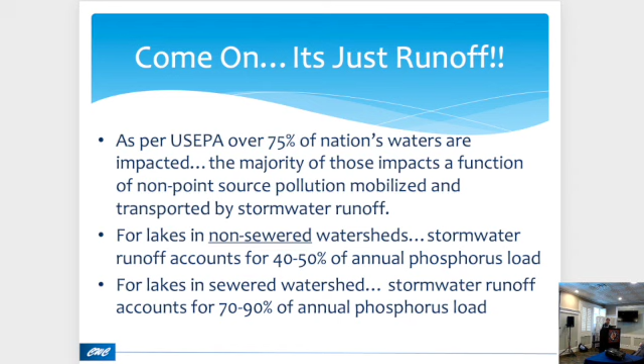So, like I said, I've studied numerous lakes, and I can say definitively for lakes in non-sewered watersheds, where you have septic systems, stormwater runoff accounts for about 40 to 50% of the annual amount of phosphorus that enters your lake. And when you have a sewered watershed, the numbers jump up even more significantly. 70 to 90% of that phosphorus that enters your lake on an annual basis originates as stormwater runoff. So it is a big deal for lakes because the eutrophication of lakes, what makes our lakes greener, more algae blooms, more harmful algae blooms, even more plant growth, is all directly linked to phosphorus.

And when you look at the concentration of phosphorus in stormwater runoff, it easily averages around 0.3 milligrams per liter, okay? That's tenfold more than what is enough to stimulate and sustain a harmful algae bloom. And that's with every single storm. That stormwater runoff has concentrations from about 0.275 to even greater than 0.5 milligrams per liter. That's a lot of phosphorus that's entering your lake with every storm event.

So as a result of that, and this has been sort of a common thread with my recommendations for all lakes, you have to manage stormwater runoff. Managing runoff results in less phosphorus. Less phosphorus means your lake is not eutrophying as quickly, means that you're not seeing as much algal productivity. Less algae blooms, less infilling from sediment, things like that. So stormwater management has to be a foundation of every single lake management and restoration plan. That has to be your foundation because it's your biggest source of problem.

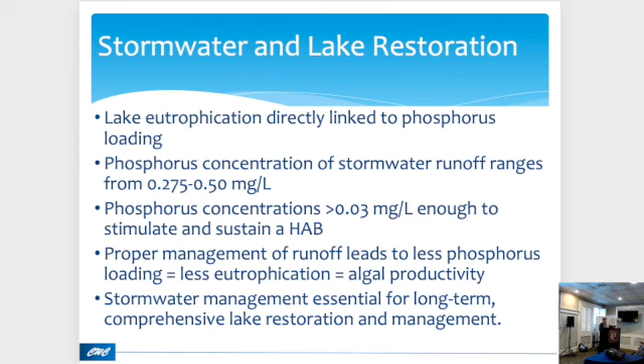So why does this happen? I'm not talking undeveloped watersheds, I'm talking minimally developed watersheds, okay? Every time it rains in a watershed that has not been extensively developed, only about 10% of that precipitation actually emanates as runoff. The majority of it gets absorbed back into the ground or is absorbed by plants and is lost via evapotranspiration. So only 10%, because there's not a lot of impervious cover, so the ground can soak it up, the plants can take it up, and you're not generating a lot of runoff.

But when we flip the table, now about 55% of that precipitation generates runoff. Okay, so that's a big, big difference. And you're probably saying, okay, well, I have to have development like something that I would see in Newark or in Camden. No, that's not the case. You start to see these problems with impervious cover of only 10 to 20%. What does that equate to? That equates to 1 house per acre. Okay, that's suburbia, all right? Not urban land, suburbia. So you start to see these problems with a minimal amount of development.

And that's why our lakes are subject to so much phosphorus loading and why we're subject to these problems with harmful algae blooms and extensive productivity.

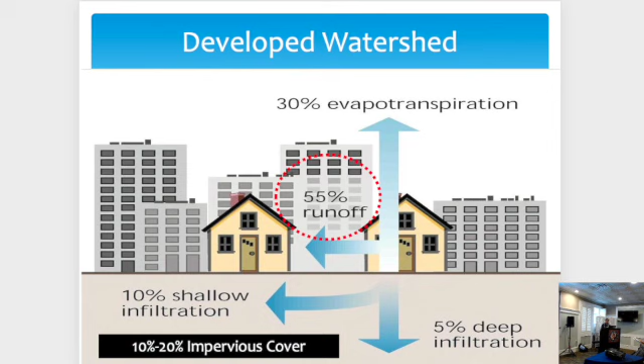Okay, so Sabine knows all of this stuff, and I'm sure there's a lot of others in here that know this, but the problem with development on watersheds is that you end up generating more runoff that leaves the land and enters the stream that feeds your lake or directly into your lake. That runoff is generated earlier in the storm. It's generated at a higher rate, so it starts to mobilize and transport more pollutants. And there's an increase in volume, and that's the big thing, because volume is our problem, okay?

We can control the rate of runoff very easily. I'll show you some examples. However, volume is something that is very difficult to control, particularly with our state's stormwater regulations. Our regulations are primarily rate-based, not volume-based, okay? So as you get more impervious cover, you generate more runoff, it gets to my lake much more quickly, it mobilizes more pollutants, and I have more coming into my lake, all right?

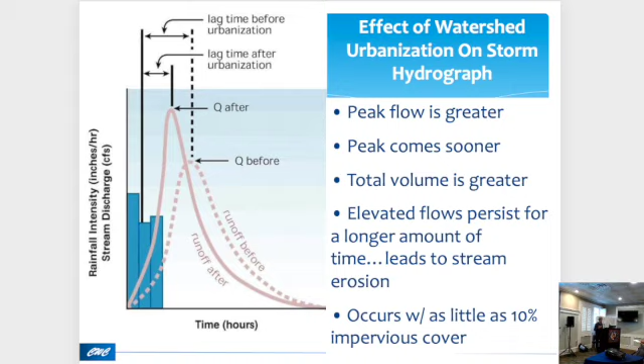So that results in this sort of cascading effect where I change the land use within my watershed. That results in a change in hydrology. When we talk about hydrology, we're talking about volume. It also changes the hydraulics of that runoff. When we talk about hydraulics, it's how fast that water is coming at me. So it's volume and rate.

You end up with more runoff, you end up with more pollutant loading, that accelerates eutrophication, and then all these other problems that we see: impacted lake use, degraded aesthetics, harmful algae blooms, and the cost to manage our lakes, all because of a little bit of runoff, all right?

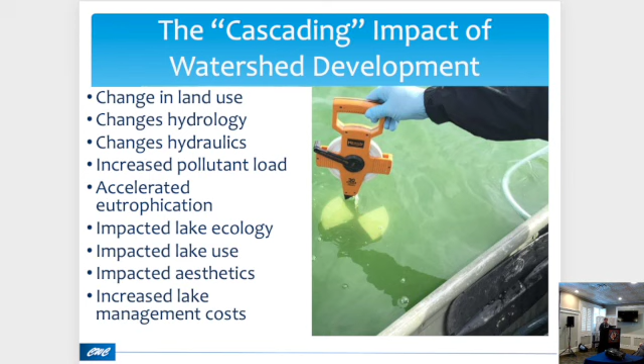Now, as I said, our state's stormwater regulations, although they have been modified repeatedly, and they were modified significantly just this past year, are still primarily rate-based. And the way most engineers have been taught to deal with runoff is to think of it as a waste product. So what do I do with it? I try to collect it and concentrate it as quickly as I can. In some cases, I may have a basin that it gets routed to. It's held in that basin for a given amount of time, and then it's released, okay?

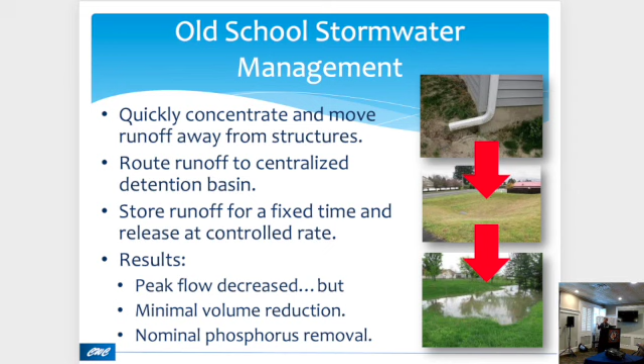But in most cases, it's routed to a detention basin, and with detention basins of the old school design, you have minimal opportunity for pollutant removal, you have minimal opportunity for recharge, and yeah, I can hold the water back, but I'm not decreasing volume. So the fallacy with detention, which is the standard approach that engineers continue to utilize to manage runoff in this state, is to collect it, hold it, and then get rid of it, all right?

But when you have a basin like that, and how many of you have basins like this in your watershed? Have you gone around and taken a look, with a concrete low flow channel, they're mowed, there's not a lot of vegetation in there? Those basins have a compacted bottom because of the way they've been constructed. So the soil is compacted. That impedes recharge. It's covered with grass. The roots on lawn grass are about 1/2 inch. That's about it. So again, there's no way to really help that collected runoff permeate down into the soil.

And in addition to that, because it's just plain old lawn grass, there's no filtering, there's minimal opportunity for bioassimilation of any of those nutrients. And so, yeah, this can do a really good job at detaining flow, but it doesn't do a really good job at treating stormwater, and that's what we really need, okay?

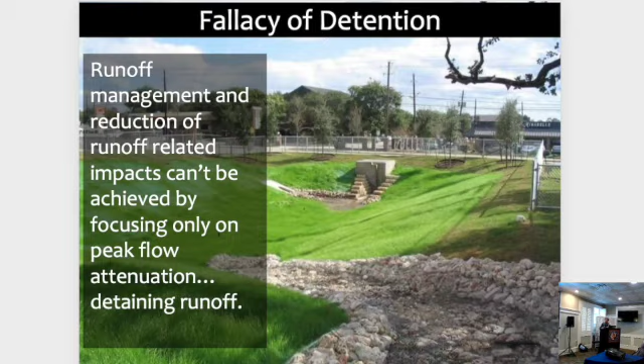All right, so what can we do? There are a lot of things that we can do. Some of these fall on our own shoulders, and some of them can be done on a community scale, either with or without the cooperation of a municipality, okay? So I'm always a big advocate of: number one, it's my problem. Let me see what I can do to solve my own problem.

And I try to divide stormwater management into 2 categories: source control activities and delivery control. So with source control, what I'm trying to do is prevent the problem from happening in the first place or decrease the problem. That means, for instance, I'm going to decrease the amount of phosphorus, nitrogen, and sediment that's coming off of my own property or the Lake Association's property. I'm also going to look at ways on my own property to decrease the amount of runoff that's leaving my site. I want to embrace that. I want to think of stormwater as something that's beneficial.

It's not a waste, it's a resource. I want to hold on to that as opposed to just pushing it off and making it somebody else's problem, like has been the problem that Anthony was talking about. You know, we don't want that.

In addition to that, then, there are ways that you can collect and better manage that runoff, and that happens through delivery control, where I'm going to use structures to intercept that runoff and either treat it before it's released, so I decrease pollutant load, sediment, nitrogen, and phosphorus, or I can hold it and maybe decrease volume.

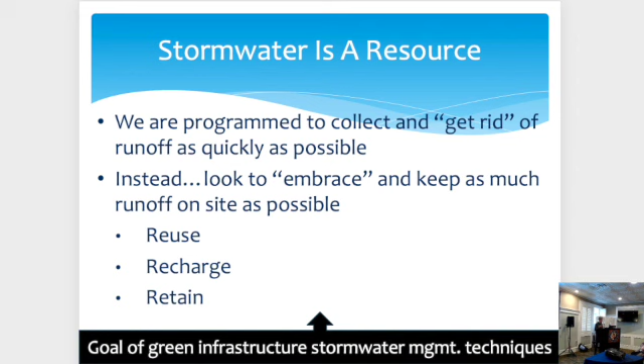So instead of being programmed just to get rid of that, let's look at ways that we can do that. And there's a lot of examples that are called green infrastructure stormwater management techniques. They use vegetation and soils in combination to really decrease runoff volume and keep runoff on site as long as possible. And those techniques really help turn down the volume. And I'll say it once and I'll say it multiple times, it's the volume that's the problem, okay?

And so anything that we can do to put water into the ground or harvest it and retain it. You may think, okay, if I have a rain barrel, that's only 100 gallons. However, that's 100 less gallons that ends up in my lake. And I can use that to water my vegetable gardens or flower beds or whatever, and that's 100 gallons less of water that's coming out of my well, or water that I'm paying for as part of my monthly utility bill. So there are benefits from a cost saving standpoint, as well as from a stormwater management standpoint.

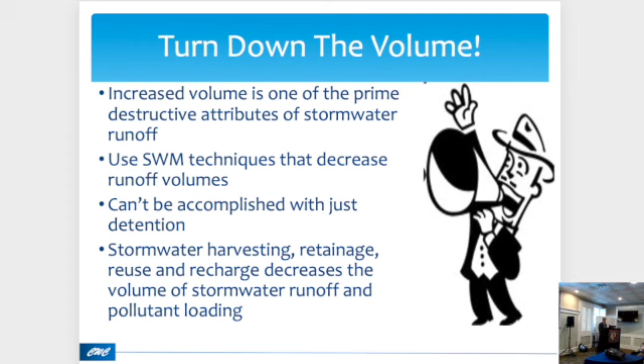Now, this is a big part of the problem with the way engineers and the way the rules are written in dealing with stormwater runoff. Number one, in New Jersey, because this is a developed state, a lot of the development, particularly in central and North Jersey, maybe not so much in South Jersey, occurred prior to 1975. What's the importance of that? Well, up until then, New Jersey did not have any stormwater regulations at all. So somebody built a parking lot, an Acme, whatever, and there was no need to manage any of that runoff.

It would just be discharged into a storm sewer system and then on its merry way to a stream, wherever. The thing is, even now, New Jersey's focus is really on the larger events, what's called the 2, 10, and 100, or more correctly the 50%, 10%, and 1% storms. A lot of the damage, though, is a result of much smaller events. If you look at the New Jersey stormwater management rules, rate control only applies to the 2, 10, and 100-year events. The 1-year storm is considered the water quality event. There are some requirements now to intercept that and manage it with green infrastructure to decrease volume, but those regulations went into effect in 2021.

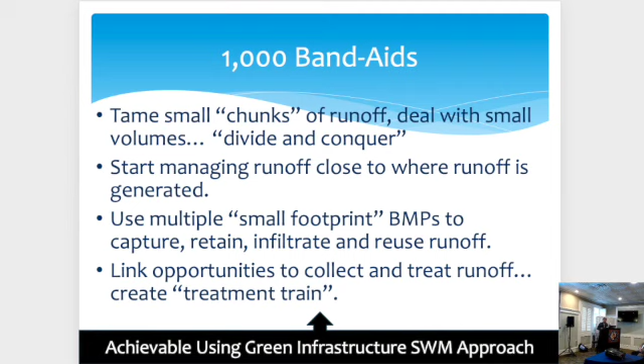And then with green infrastructure, we're using a combination of soil and vegetation. It's just not vegetation. So it's not just I dig a hole, I plant a bunch of plants in it, and I cross my fingers. You have to have the hydrology, the soils, and the vegetation all working together. But when done correctly, you can significantly reduce the volume of runoff entering your lake. And these are perfect strategies for lake communities.

So what I'm going to do is show you some examples of green infrastructure that can be done on a single lot application and also on a community-based application, including actual projects implemented with private money as well as public money throughout the state. So the first thing, this gets back to what I could do on my home base that probably is not even going to cost me much money.

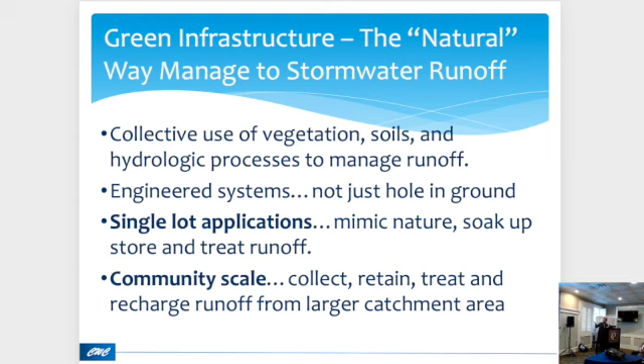So one of my lake clients, she came up with this term lazy landscaping, which I loved. And essentially what I'm going to do is, number one, wherever I have lawn, I'm going to look for ways to decrease lawn. If I lived on a lake, I wouldn't want to be spending my Saturdays and Sundays mowing. I want to spend my Saturdays and Sundays enjoying the lake. So why have all this expansive lawn?

But in any event, alternative ground covers, decrease the amount of turf in lawn. Avoid fertilizer and pesticide applications. In most cases, you don't really need any of that by aerating and liming your lawns. And especially for lakefront properties, do shoreline buffering. And I'm going to show you examples of that.

And then we have the opportunity to collect and hold on-site runoff. So rainwater harvesting, even though each one of those barrels may only store 50 to 100 gallons of runoff, that's 50 to 100 less that's entering my lake. Those of you that know Chris Obropta, he calls rain barrels the gateway drug to stormwater management.

People do this on an individual basis, or they do it on a community basis. It's a scout project or whatever. And then all of a sudden everybody's, okay, that's not too bad, I can do that. And then, oh, what's this stuff about rain gardens? Maybe I'll do that as well. So it becomes sort of like an entry into on-lot individual stormwater management.

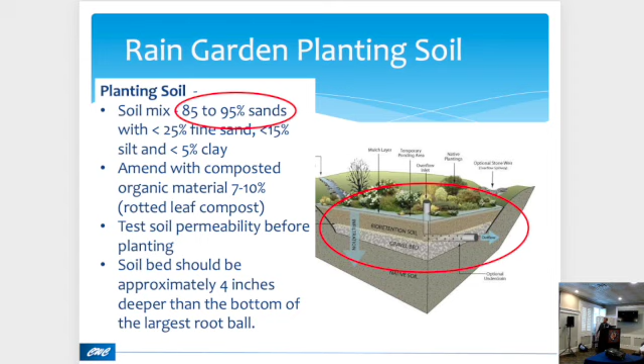But this is right out of the stormwater manual. Guidance for individual rain gardens. And if you want even more design, you can download this document. This is from Rutgers. I've provided you with the link to that PDF, and this is Chris Obropta's baby.

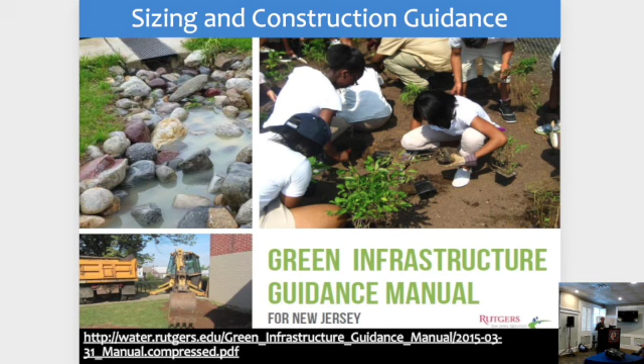Basically this manual will tell you how to compute the size of the rain garden that you need, how big, how deep it needs to be, the correct type of soils, and it'll provide you with a whole variety of plants that you can use successfully in those rain gardens. And then additionally, there's an app for this, believe it or not. So University of Connecticut has this great app.

I've got it on my phone. You can go onto your own property, identify what type of soils you have. It will provide you with guidance in terms of, again, the basics, how to design it, what plants to put in the system, what's going to work where it's a little bit drier as opposed to a little bit wetter.

One thing to keep in mind with rain gardens, because they're designed to deal with those more frequently occurring events, but they're also designed to put water into the ground, not to keep it there in a flooded condition. You're going to be dealing with plants that are more drought tolerant than wet tolerant. Okay, so that's one thing to keep in mind. They like to be inundated and be saturated for a while, but for the most part, they're going to be probably pretty dry in those little rain gardens. Okay, so it's something to keep in mind.

But anyhow, this app is another great way of providing guidance on how to build a rain garden, what to put in it, and how to maintain it as well.

Dry wells, I have one at my house that I put in. I moved into that house in '82. Probably put that in around '86 or so. It only deals with one of my roof leaders. And it was one of my first forays into doing stormwater management. And I have clay soils, but these can work. I'm not going to be able to put all of the runoff from my lot into this. It would surcharge. But for a small amount of roof runoff, it does a great job of getting rid of that, puts it back down into the ground.

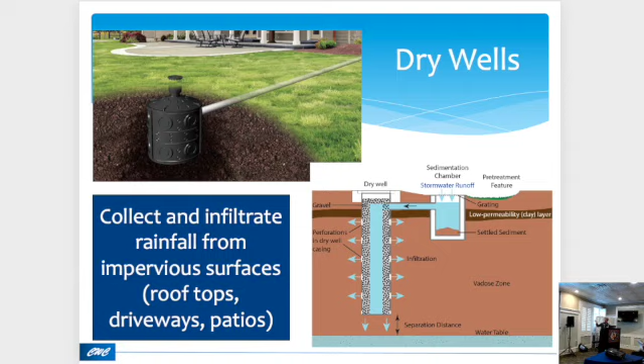That separation of pervious and impervious surfaces. So here's a perfect example. Like I told you, with the driveway. I have a driveway adjacent to my lawn, the water draining off my lawn hits the driveway. I can intercept that. I've done that at my house too. I have about a 5-foot wide flower bed that just runs down along the side of the driveway. And I got a couple of places where people can walk through the flower bed. But it's an easy solution to grab some of that runoff and deal with that, as opposed to just transferring it on top of my driveway and then exiting my property.

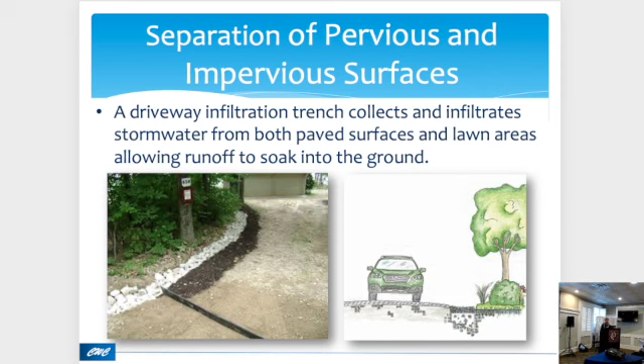And then pervious surfaces, yes, there's been a lot done over the past 2 decades with pervious concrete, pervious macadam, and pavers. Any way that you could utilize those types of surfaces to, rather than just sheet flow water off, put it back down into the ground. There's a lot of examples of how these pervious pavements have been utilized. I got a couple of 319 projects where I actually got funding to do that on larger municipal lots as part of a 319H funded lake restoration program. But these work really well.

They do require specialized maintenance. They need to be vacuumed. On these larger applications, they do need to be vacuumed a couple of times a year. Obviously, you're not going to put seal coat on top of your porous concrete or pervious macadam, because that'll defeat the purpose. But they do need specialized maintenance, and that's some of the pushback that you get from towns. They don't want to do that specialized maintenance, so it's easier just to put in the old school surfaces. But these are easy to implement measures.

I know for a while I was the stormwater consultant to Mendon Township, and when people would come in for a permit to do, say, a new patio, the town required it be done with some type of pervious surface to decrease the amount of runoff being generated from that site.

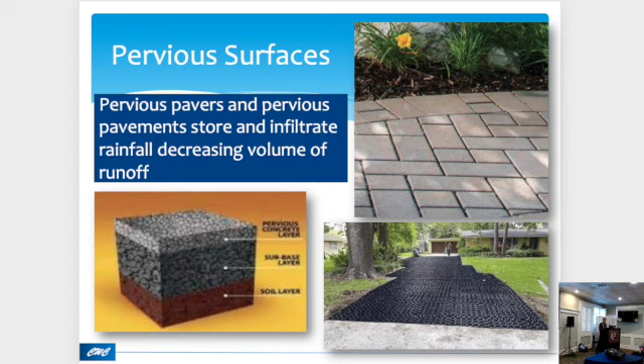I've already mentioned the alternative covers, but although it's Ocean County Soil Conservation District, go to their website, because they have techniques that are applicable for every part of the state. Yes, they have sandy soils down in Ocean County. However, they have been a huge proponent of alternative ground covers and techniques that can be used as a way of decreasing runoff. So check out that website. There's a great bunch of information there.

And those of you that have heard me speak know I am a huge advocate of maintaining a vegetated shoreline buffer. They don't have to be extensive. 5 feet would be very helpful. 10 feet, perfect. And if you already have some erosion, you can use coconut fiber logs to address some of that erosion. This is not going to address severe erosion, but it's a way of creating a temporary stable edge, backfill and plant within that. Most of you are familiar with those coconut logs, right?

No? Okay. They come in different diameters, from 8 inches to 24 inches, typically in 20-foot lengths, and you can stake those along the edge of your property. If you've got some erosion at the edge of the lake, you can stake that in, and you can actually bore into them with a drill and plant within them. The coconut fiber logs will probably degrade in about 5 to 7 years, but over that time they provide you with that stable edge. Then you plant behind it, plant within it, and it's a good way of addressing edge erosion in a very cost-effective manner.

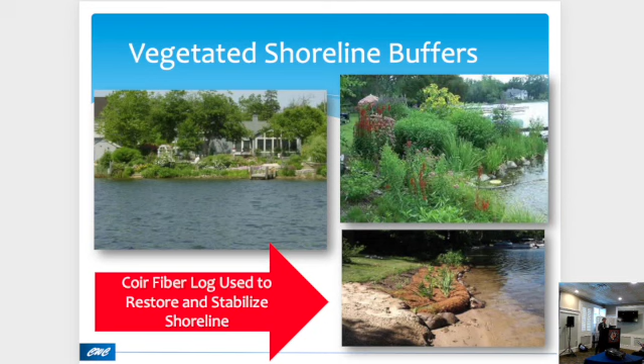So that is one of the best proven ways of decreasing goose usage, maintaining buffers along the perimeter of your lake. But our problem is our dam has to be open, so we really can't plant this. No, you can't do that on your dam, but you can do it on each of your properties though. The problem with Canada geese is that they've become acclimated and they no longer migrate. But, for instance, the Deal Lake Commission has an annual addling program. So they go out, they addle the eggs, they get a permit from USDA.

It's lethal, but it's not really killing any existing geese. They come back and they nest at the same places all the time. If all of a sudden they're not being successful, they're going to move someplace else. Most geese, their lifespan is about 15 to 20 years. So if they're not generating a successful hatch, they're going to go someplace else. We did a goose removal about 8 years ago, 62 geese. I myself personally will go out and addle all the eggs. We haven't had baby geese in probably 7 years.

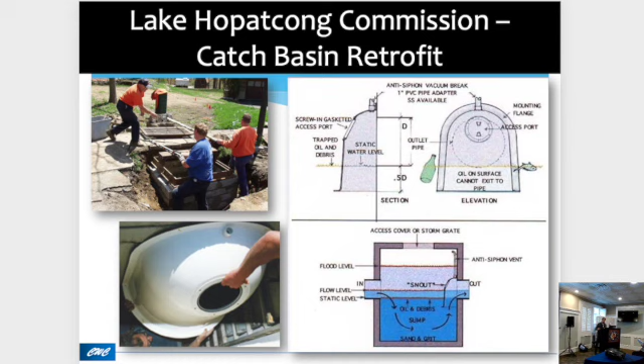Around Culver Lake, this is a perfect example of a public-private partnership. Through the Conservation Foundation, well, first off, I ended up modeling the watershed. I identified some of the worst drainage areas and what catch basins were associated with those in terms of the amount of pollutants entering the lake. What happened is that the foundation purchases these inserts. These are basically big filters. They cost maybe about $1,500 a piece. The town puts them in, and the town maintains them. So public-private partnership. And why?

We encourage the town to do that because they can get points for MS4 compliance. Now they can go back to the state and say, we have done X number of retrofits. We clean these out 2 times a year, and they get points for that.

And these are capable, as long as they're maintained, of removing, and this was by actual measurement, about 99% of the suspended sediment that enters those filters. So as long as they're being maintained, they do a great job of removing pollutants, but yet allowing water to flow and not backing up into the storm sewer.

Go ahead. Do you need permits to do that if you already have storm drains? Would you want to update them? Nope, no permits needed for that. I mean, if it's public roads though, you're gonna need. Private roads, no, you don't need a permit for any of that. So you can update your own? Yep, update your own.

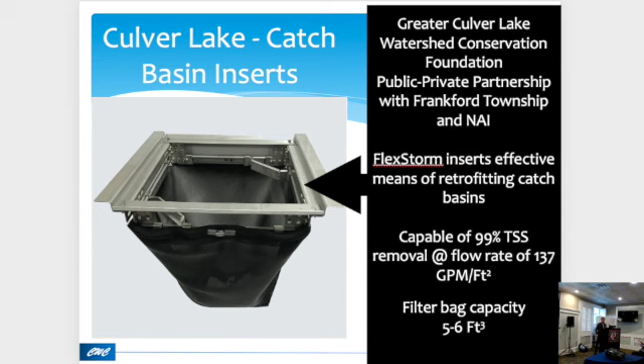So where is this placed in Culver? Is it in the drains? Here you go. Yes. So this is a conventional catch basin. Basically, the grate is popped off. These do have to be designed specifically; there's some that come off the shelf. But most of the catch basins around Culver Lake are like what you find in most lake communities. They're not uniform, so that's what adds to some of the cost.

But it's basically just an aluminum frame with this heavy-duty filter bag in it. The town just pops the top off of the catch basin, inserts the filter, and puts the grate back on top of it, and that's it. And then to maintain it, they come through with a vacuum truck, pop the top off, vacuum it out, and go on their merry way.

So, a suggestion that had been made to us is using in the drain a charcoal. Yeah, like a biochar. Right, so with biochar you gotta be careful, because there's some that are designed for agricultural use and actually generate phosphorus. So you have to make sure you're using a biochar that will absorb phosphorus and heavy metals.

The biochar works great. It's going to be one-dimensional, though. It's going to absorb nutrients; it's designed to absorb dissolved pollutants. So that's a great addition, particularly if you don't have a lot of sediment problems but you have a nutrient problem to deal with. Not the sediment. But that is a really good technique.

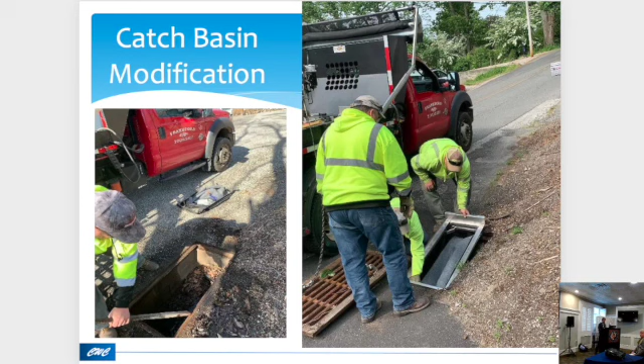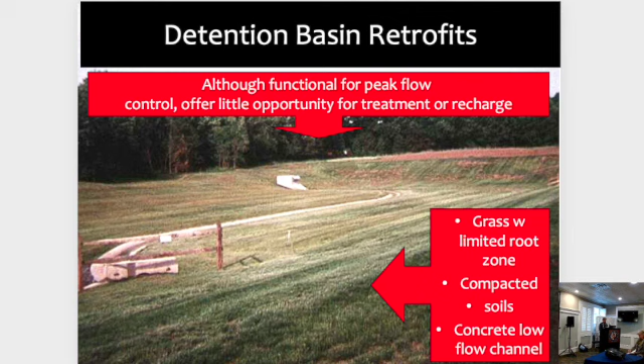So anyhow, there are ways to alter these, and there's funding available for this too, again through 319. This is a 319 project. This particular location, this is almost in my backyard, Clausen Park in East Amwell, Ringoes, but conventional detention basin, all right? You can see basically what would happen after a rainfall event. You see that little house up on the top left-hand side? So that's a conventional detention basin after a 1-inch storm. Water would just sit there because the basin bottom was compacted.

These are some examples at Deal Lake. We put in these bioinfiltration basins. This is another one of these, like, you scratch my back, I'll scratch yours. The golf course had a problem with standing water on one of their fairways. That water then just drained over to the lake. We had some grant money, worked with the town, and said, hey, we can put in these infiltration basins. This is done right alongside the cart path, didn't interfere with the fairway, keeps that fairway dry now. Golf course is happy, Deal Lake is happy.

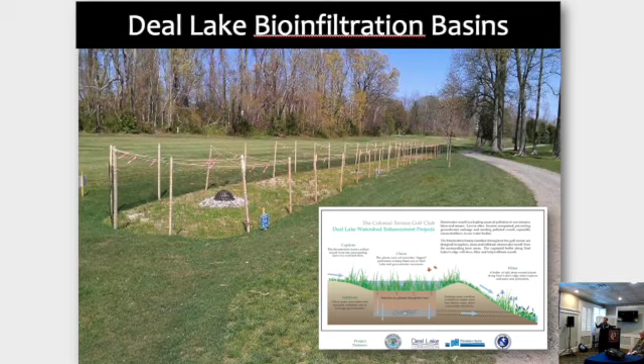This is another example. This is at Manalapan Lake down in central New Jersey. These were conventional parking lot medians, and all we did was just, rather than have them convex, dig them out, make them concave, and then plant them with a variety of different types of wildflower. There is this control structure there. It does hold back water, but all of that runoff previously, undetained, would just go down to the storm drain and then down into the lake. Here now this runoff gets intercepted.

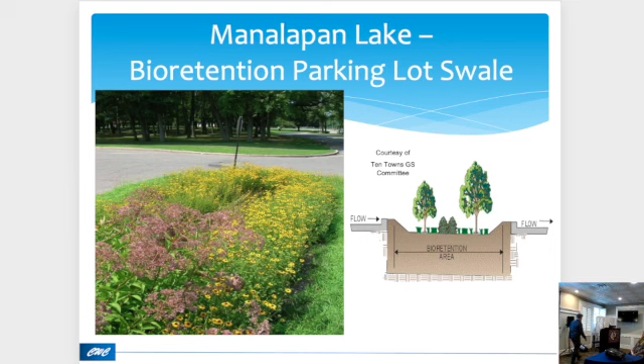This is just curb cuts that were done, and just by making this like a hollow, we can retain a lot of that runoff and treat it and put it back down into the ground without it entering the lake. And there's plenty of examples of those types of conversions.

Some of you may be familiar with tree boxes. These are used in more urban applications, but you can use this as a way of, again, with catch basins, to convert conventional basins into more stormwater friendly types of treatment devices. So this is an example of a tree box installation. Some of you can go out and look at this. This is at the police and court complex right off of Route 46.

So this drains to Forge Pond, but I'm blanking out on the name of the town. Parsippany? Parsippany, yeah. So this is at the Parsippany Police and Court facility. And essentially this was grant money. This was through 10 towns in Great Swamp. But basically all we did was look for where water moves and then took 3 or 4 of the existing conventional basins and replaced them with these tree boxes, okay?

And then to help move water to the basins that we wanted to convert, we just put in these speed bumps. And all those speed bumps did was serve as little gutters, and they just push the water into the basins that we wanted to have some treatment done. Simple type of thing, all right?

Another example. This is a project that I did down in Ocean County Park in Lakewood. Tree boxes that were put in adjacent to Swimming Lake, and all this does is just collect runoff from the parking lot. You don't have to plant it with a tree. You can plant it with everything. It's not really the vegetation that does most of the work. Most of the work is done by the soil media, okay? Which does need to be replaced maybe once every 5 to 7 years or so. But you can plant them with just about anything.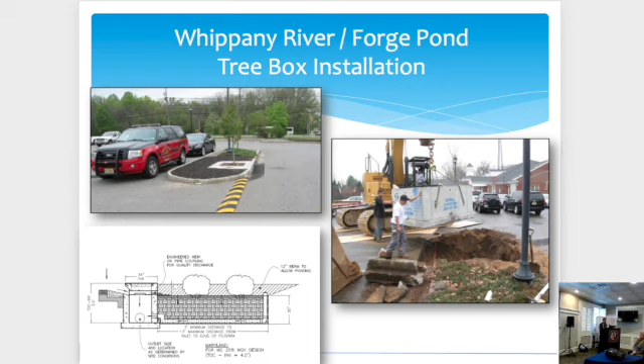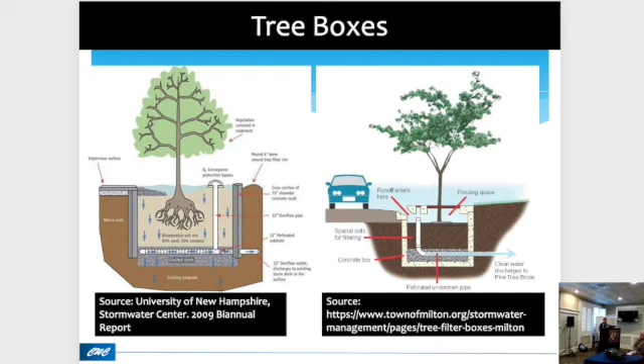How does the water get into the tree box? Yeah, great. There's an opening here. So it basically comes in, gets into the tree box, and then this is the under drain. So if you look at this cutaway, you'll see there's like an under drain in it. And so as that water permeates down through that media, it gets treated and then it gets shunted back out to the lake.

So in this particular application, we couldn't put a box in that was large enough; this is a large parking lot, probably over 1.5 acres. But it'll deal with the runoff from the 1-year event, but anything bigger will bypass it and then go into where it all used to collect anyhow. You can go larger scale.

So this is what's called a manufactured treatment device. These techniques are also in the BMP manual. But essentially with these devices, it's a concrete box. This is a pretty small one. This is at Sunset Lake, in the city of Asbury once again. But it's managing runoff from about 6 or 8 catch basins at this highly traversed intersection.

And basically the way this works is that the water enters here, okay? This device is called a helical swirl concentrator. Fancy word for just something that spins the water, slows it down, and causes the sediment to settle out. And then each one of those baffles has a slit at the bottom. So the box will fill up, and then over time it'll drain out. This is sized once again for the 1-year storm. Bigger storms are going to bypass it.

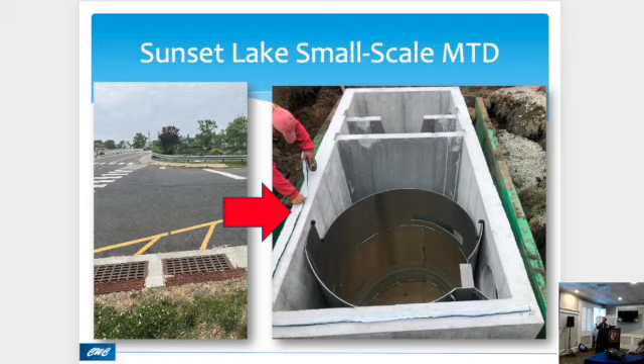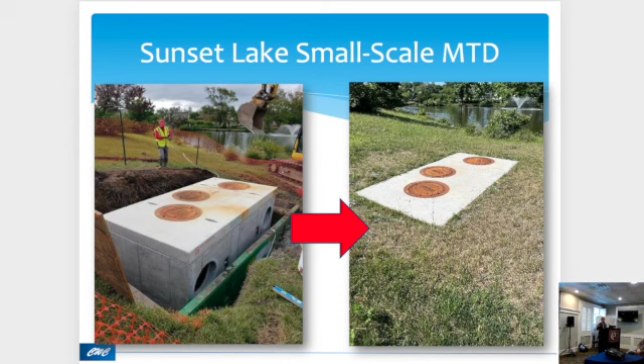So here you can sort of get a sense of the bypass. This is that same installation. Water would come in. Eventually this is going to have a knockout here. If there's larger events that this can't handle, it'll bypass this system. What's treated will come through and then exit out into the lake. In some cases, you don't have the capacity to build something large enough to deal with all the storms. But it removes a lot of particulate pollutants, not so much dissolved.

This is a larger installation. This was done at Harvey's Lake, which is out in the Pocono area of Pennsylvania. That basin went in, and within 4 months, it had already removed 8 tons of sediment that otherwise were entering the lake.

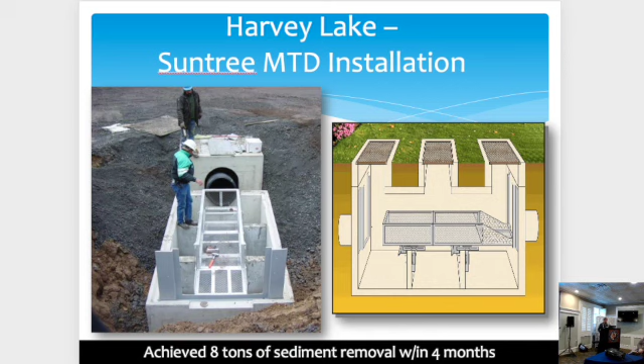This is a large MTD installation. You can get a sense of how big this box is. And I was explaining, we just put in another set of these around Deal Lake, which is about 1/3. If you took this half of the room, about 1/3 the size of this, what we're sitting in right now, where everybody's sitting. About 2/3 of that is under the ground, managing runoff.

This one's a little bit smaller, but it's still pretty big, and that removes over about 3 tons of sediment per quarter. So yes, the city of Asbury Park does come in, they clean these out, they will put in with grant money, but all of that trash, litter, floatables, we're in a highly urbanized area, all of that was entering the lake, and they were spending tons of time as part of the lake cleanups,

getting rid of all of that trash. So now Deal Lake probably has about, last count, I would say 4 of these big structures, and people would walk by, you wouldn't even know that they were there. You just see manhole covers.

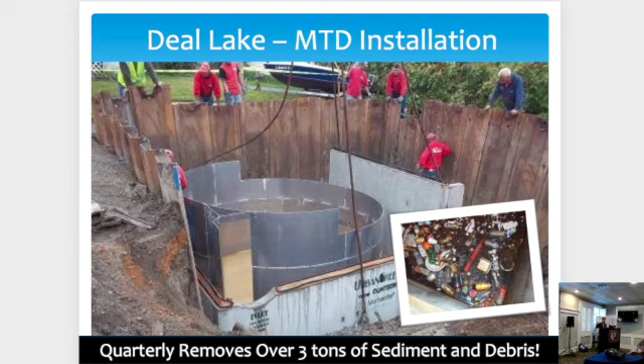Another example of public-private partnership, this is another project done at Culver Lake. These are some small-scale alum injectors. We've got 2 of these in right now. Again, these were purchased by the foundation.

The reason why it's public-private is that we did have to make some minor alterations to the catch basin. It's a pretty big catch basin that this discharges to. So we had to get the town's approval to do that. They don't really need to maintain anything, but that is an example of something else that can be done to decrease phosphorus loading.

And right here at Lake Mohawk, it's a project that went in, I think, maybe 2007, 2008, if I remember correctly, Sabine? Okay. This is at Beach 6. This was a DEP 319H funded project, done in combination with assistance from Sparta Township. So yes, we needed their approval to do this.

They became part of the grant, they were part of the grant application, but we're able to put in an alum injector on one of the storm sewer systems. There's actually 2 of them in on this lake.

Yeah, Mike? On that previous slide, is that also contained, it's solar powered? This one's solar powered. Is it triggered on like a rain gauge type of thing? Yeah, so it's got a tipping bucket, and then this is designed to deal with the 1-inch rain. So, that tipping bucket fills up, and then it triggers the pump. The pump runs for a specific amount of time that's all been computed based on how much alum we want to get out into that storm flow.

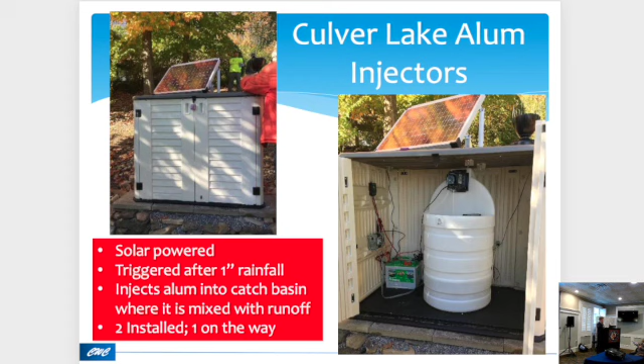Okay? And so, we get down to the end of this, and I'll go through this pretty quickly. Where's all this money come from? Well, first off, that 319H program has been what I would consider like a gold mine for the lake communities, particularly public lakes. But it is about 10 to maybe 13 million per year that comes from the EPA through the Clean Water Act to the state.

And then the state, it's a very competitive program. They'll issue a call for proposals, and then they'll fund projects. They normally get about 10 times more applications than they can fund. But in any event, they'll usually fund maybe about 5 to 10 projects annually.

501(c)(3)s can also apply for that money. Okay, yeah. We are a private lake, right? Yep. And Anthony mentioned Mr. Sears in the town, and he brought to our attention some of these huge grants. Last year there were two grants. One of them was $4 million, the other one was $7 million. When I tell you we checked off every single box to qualify for one of those grants, except that we were a private lake. And the town told us it won't happen.

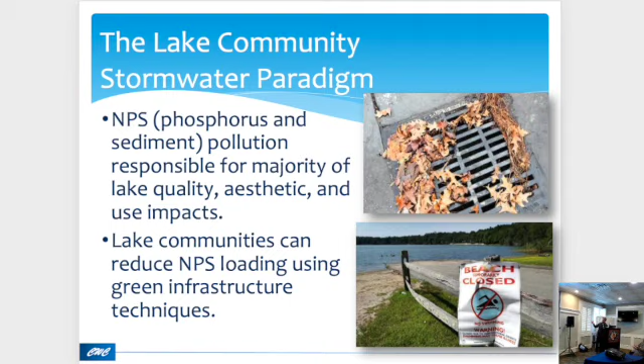But in order to do that, we want to start off thinking of runoff as a resource, manage small amounts. For green infrastructure to work properly, you can't take 50 acres and drain it to a little rain garden. It's not going to work. So you need to understand your watershed, divide and conquer, and then also look for techniques to eliminate or reduce runoff, or at least decrease the pollutant load associated with that runoff. And then find easy to implement small scale ways to collect and treat that.

So source control, eliminate the problem or reduce the problem. In delivery control, I treat the problem. And when you can do that, then maybe you can take some of the bite out of your stormwater problems.